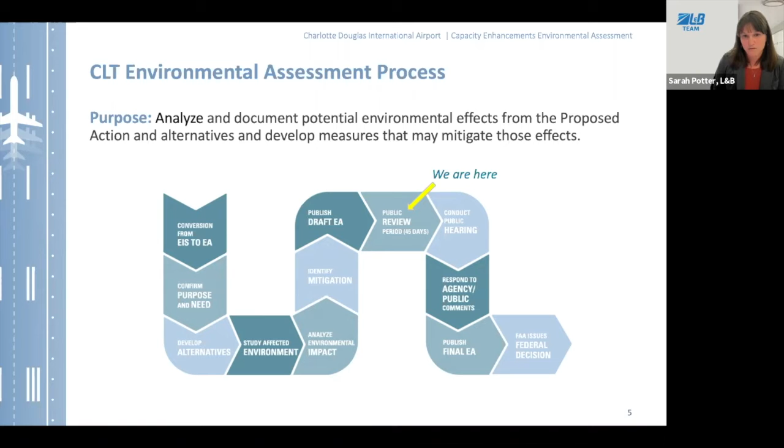At the end of the 45-day comment period, all of the comments will be reviewed, and we will respond to them in the final EA document. Following the publishing of the final EA, FAA will issue their federal decision.

Moving on to the purpose and need for the project, there are two needs that Charlotte is addressing with this project. The first is insufficient gate capacity and ramp congestion.

A gating analysis was completed based on FAA approved forecasts. If no additional gates are built, a total of 140 gates would be needed by 2028, and 150 would be needed in 2033. Without additional gates, aircraft would have to hold on the airfield after landing to wait for an available gate.

Having aircraft hold on the airfield results in increased congestion on the pavement surrounding the terminal, and excessive wait times during peak arrival periods, which greatly affects airline schedule integrity, ultimately meaning passengers could miss connections.

Complicating the gate shortage is the ramp movement area, the pavement surrounding the terminal complex. There are 5 concourses, A, B, C, D, and E, shown on the map. Each provides a combination of single taxi lanes, shown in red, and dual taxi lanes, shown in green on the diagram.

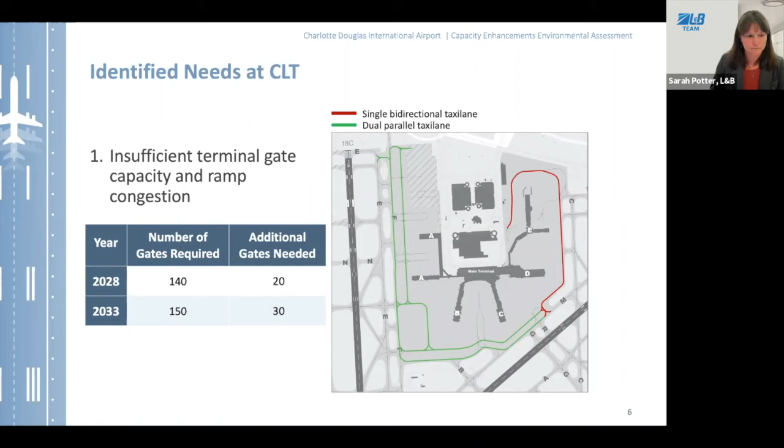The second need for the project is addressing insufficient runway capacity to meet future demand at acceptable levels of delay. An acceptable level of delay is defined as an all-weather average of 7 minutes of runway delay per operation. Airfield simulations were prepared to understand the level of runway delays Charlotte is currently experiencing.

This simulation showed throughput, the number of aircraft operations that can be processed by the runways, increases by 13% from 2016 to 2028, whereas all-weather average delays increase by 21%. These changes demonstrate that the runway system has the ability to achieve greater capacity beyond 2016, but it does so at rapidly increasing delays.

As a result, it's reasonable to conclude that the Charlotte runway system was approaching capacity near 2016. Between 2028 and 2033, the throughput increase slows to 4%, but delays would continue to increase rapidly at 24%. This relationship of throughput and delay indicates the runway system would reach capacity around 2028.

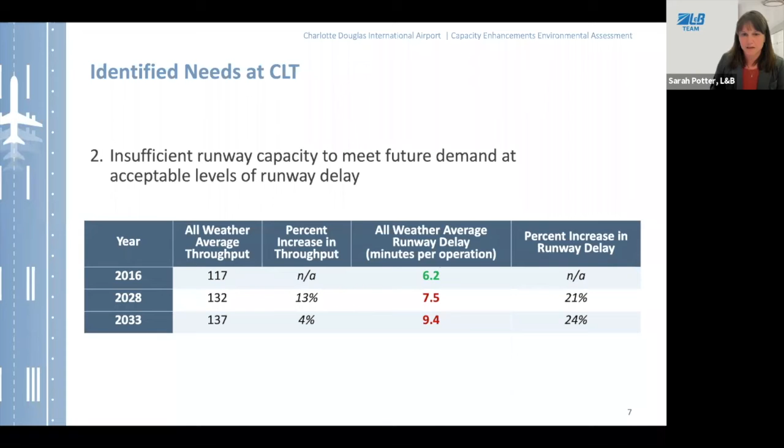The airport developed a set of project elements to address the needs just described, collectively referred to as the proposed action. The proposed action in this EA includes a new 10,000-foot runway, shown in purple in the diagram, as well as north and south end-around taxiways.

In addition, West Boulevard would need to be relocated, using existing roadways Byrum and Piney Top. Other main elements include expanding concourses B and C, creating dual taxi lanes around the terminal, closing runway 5/23, and expanding the ramp area south to create east-west corridors for efficient aircraft movement.

The Council on Environmental Quality requires that an EA explore and consider all reasonable and feasible alternatives to the proposed action that meet the purpose and need but do so with lesser environmental impact. As a result, a thorough and objective analysis of alternatives was completed as part of the EA process.

The virtual presentation posted on December 3rd of last year presented the alternatives analysis on our project website. The analysis identified 3 build alternatives that were analyzed in the EA for potential environmental impacts.

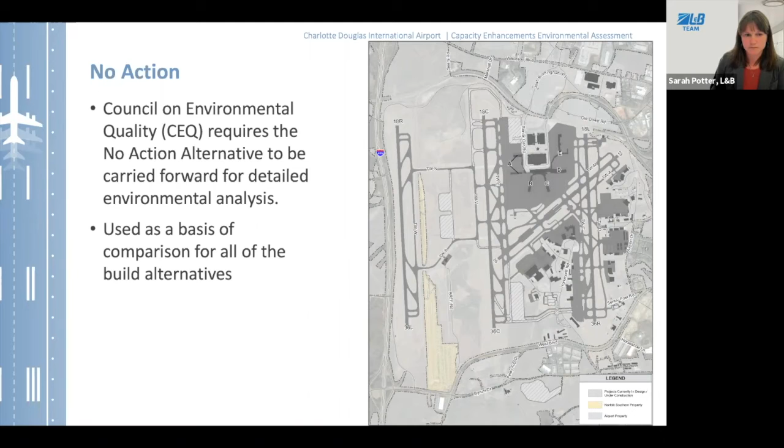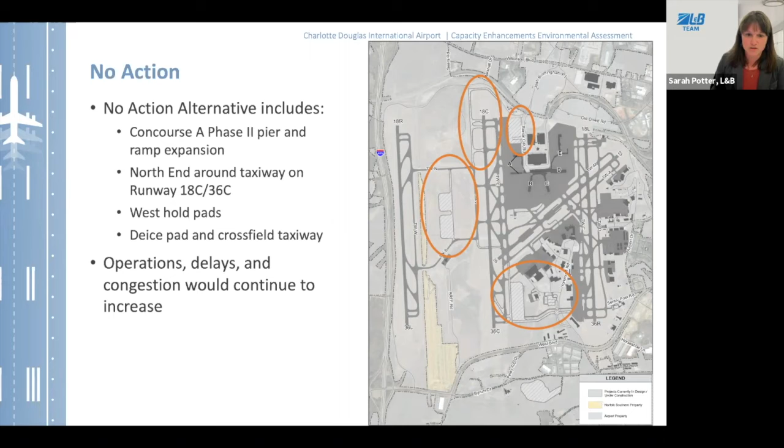In the no action alternative for this EA, airport infrastructure would remain the same as today, except with additional independent improvement projects currently under design or in construction. These projects are circled in orange on screen, and each has undergone its own independent NEPA documentation and approval process. They include the Concourse A Phase 2 pier and ramp expansion, the north end-around taxiway on the center runway, the west hold pads, a de-ice pad on the mid-south airfield, and a cross-field taxiway. In the no action scenario, operations would still continue to increase at the airport, but with an increase in delay per operation, continued congestion in the terminal area, and a shortage of gates.

The build alternatives we looked at: the first is the proposed action, which includes a new runway in the midfield with north and south end-around taxiways. This runway would be located 3,100 feet east of the west runway and 1,200 feet west of the center runway. This alternative also includes expansion of concourses B and C, dual taxi lanes, crossfield taxiway corridors, and closing runway 5/23. The new runway is assumed to primarily be used by departures, which is why it is 10,000 feet long. Arrivals would primarily use the west runway, the existing center runway, and the east runway, while departures would primarily occur on the new runway and the east runway.

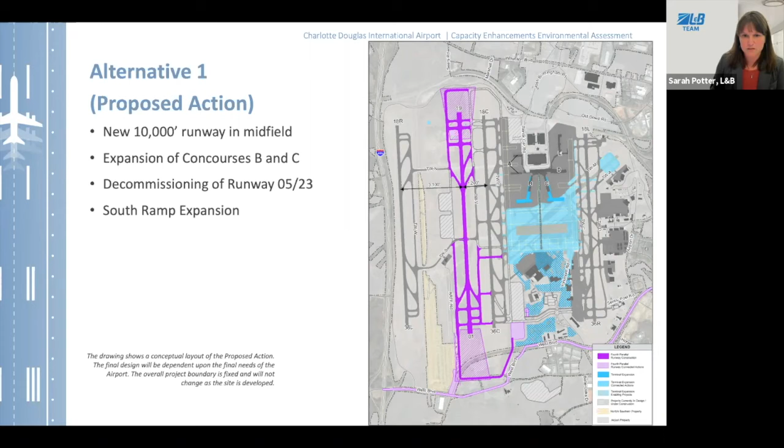Alternative 2 is very similar to alternative 1. In this alternative, the new runway is located 3,200 feet east of the west runway and 1,100 feet west of the center runway, a 100-foot eastward shift meant to take advantage of potential future runway separation rules by the FAA that could lead to different uses of the runway. This new runway is again assumed to primarily be used by departures, so it's 10,000 feet long. Runway use is the same as alternative 1: arrivals would primarily use the west, existing center, and east runway, and departures would primarily use the new runway and the east runway.

The third build alternative includes a new midfield runway located 3,400 feet east of the west runway and 900 feet west of the center runway. This new runway is only 8,900 feet long, as it's assumed to be primarily used by arrivals, so 10,000 feet is not required. Runway use in this alternative would have arrivals on the west runway, the new runway, and the east runway, while departures would use the existing center runway and the east runway.

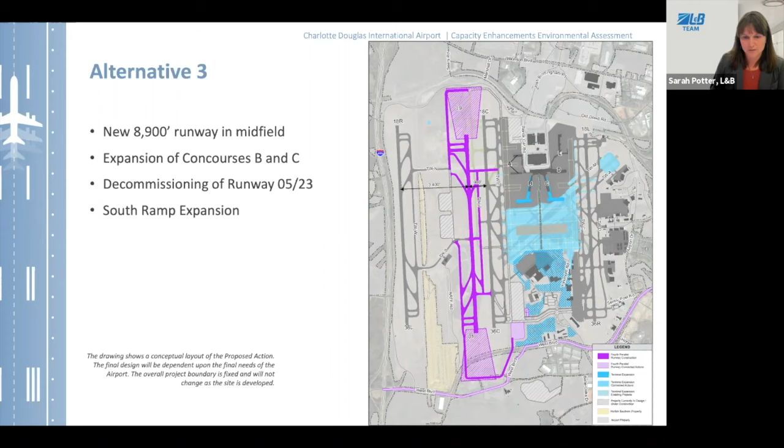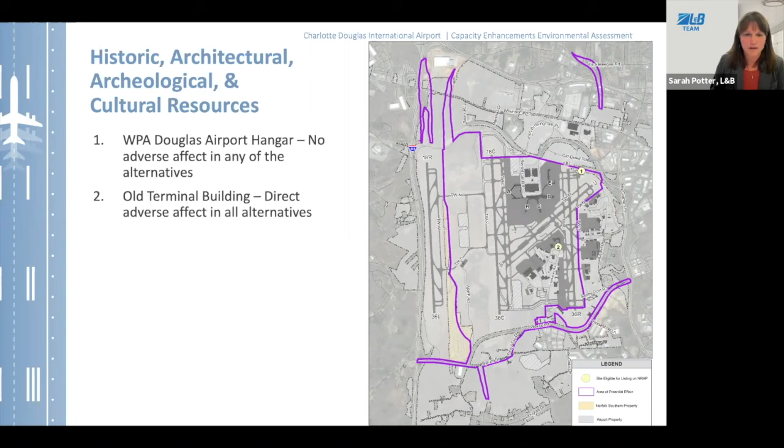Within that area, 2 historic resources were identified: the WPA Douglas Airport hangar, identified as number 1 in the northeast part of the airfield, and the old terminal building, identified as number 2 on the east midfield area. Both properties are determined to be eligible for the National Register of Historic Places, which is why the impact analysis looked at each of them. The analysis determined that the WPA Douglas Airport hangar would not experience a direct or indirect effect with any of the 3 alternatives. However, the old terminal building was determined to have a direct adverse effect, as it would be removed with implementation of all 3 build alternatives. As a result, the FAA, the North Carolina Historic Preservation Office, and the City of Charlotte will enter into a memorandum of agreement to address the impact and mitigate the adverse effect.

Okay, the next category is the U.S. Department of Transportation Section 4(f) resources. These are resources which are publicly protected, including publicly owned parks, recreation areas, wildlife and waterfowl refuges, and historic sites of national, local, or state significance.

So again, we're looking at the two historic sites that were identified in the previous analysis for historic. Both of those are considered Section 4(f) properties. There were no other 4(f) properties identified within the boundary of the study area.

The study area in this resource category was the same as historic. It includes areas where disturbance would occur and visual impacts or potential noise increases could occur. When you look at Section 4F impacts, there are two types of impacts that you analyze.

The first is a physical use, and the second is a constructive use. A physical use would occur when the action actually involves the physical taking of the property, and a constructive use would occur if the impacts of the property are so severe that it would substantially impair the reason why it was considered a Section 4F property.

So implementation of all of the alternatives was determined to have a physical use on the old terminal building, as it would be physically removed. The WPA Douglas Airport hangar was determined to not have any physical or constructive use with any of the alternatives.

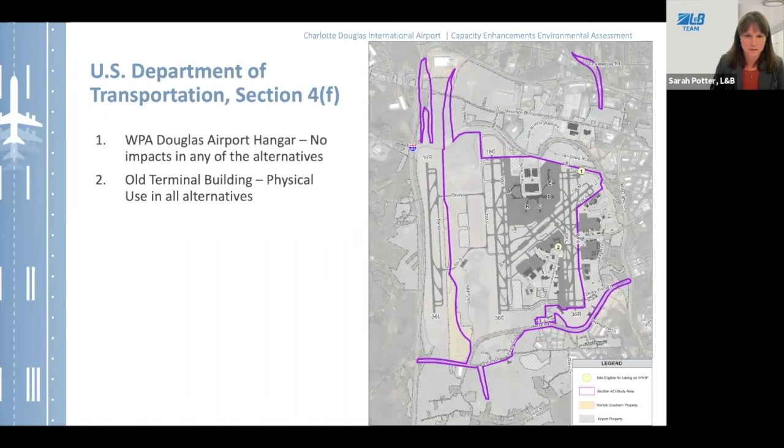All right, the next category we're going to discuss is noise and noise compatible land use. Before we get into the contours, I want to make sure everyone's aware that significant impact is defined by the FAA as if the action or the alternative would increase noise by 1.5 decibels or more over a noise sensitive land use within the 65 DNL or higher noise contour.

For example, if an increase from 65.5 to 67 DNL occurred over a noise sensitive land use, then there would be a significant impact. A noise sensitive facility located in the 65 DNL is not necessarily considered a significant impact unless it is in a 1.5 dB increase area.

The FAA also requires that all of this analysis for noise impacts use a particular noise model, called AEDT. They require us to use that model and also to prepare noise contours. You are not allowed to use noise measurements to determine impacts.

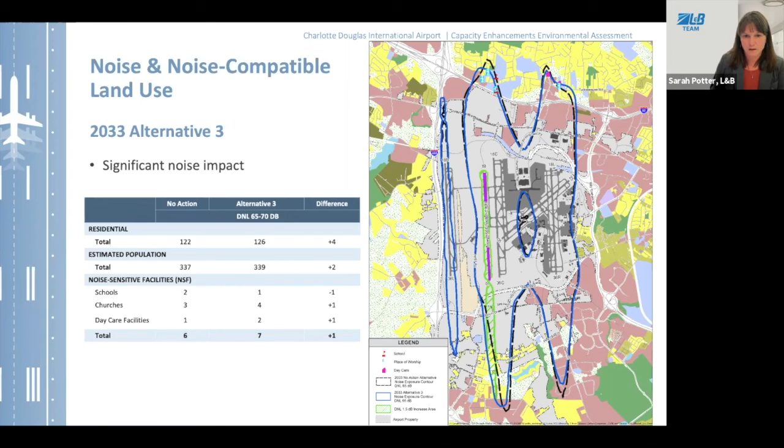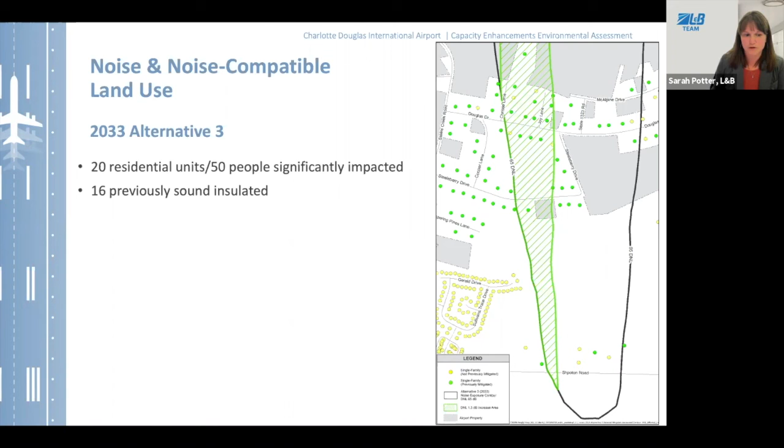The construction of all 3 alternatives would result in the permanent impact of 5 acres of wetlands, 8,150 linear feet of streams. Impacts to the wetlands and streams would require an individual permit from the Army Corps of Engineers, and mitigation would be achieved through the purchase of stream and wetland credits from the Charlotte-Mecklenburg Stormwater Services Umbrella Stream and Wetland Mitigation Bank.

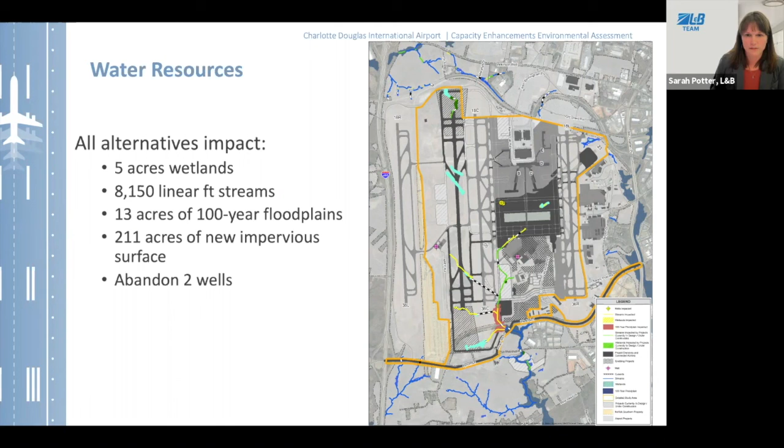In summary, alternative 1, which is the airport's proposed action, and alternative 2 would have no significant impacts on any of the environmental resource categories. Alternative 3 would have significant impacts on noise and noise compatible land use.

This ends the summary of the impact analysis that we prepared. But we just want to acknowledge COVID's potential impact on the project. The full impact of COVID-19 within the national aviation system is not known at this time. However, the industry has recovered despite every other major worldwide incident, pandemic, or recession, which underlines the demand for air transportation. At this time, we're seeing Charlotte returning to 100% of what they were operating at in 2019, so they are recovering fairly quickly compared to others across the country. They're going to continue to monitor actual traffic and delays in addition to the short-term forecast to make sure the appropriate timing of the EA projects is taken.